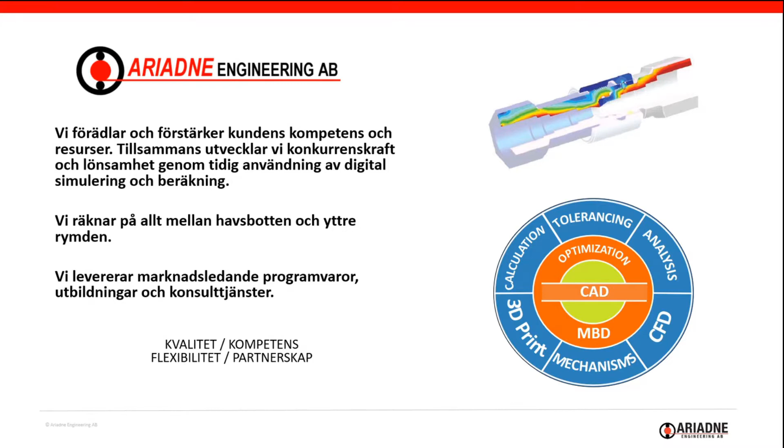Om vi tittar på bilden nere till höger ser man våra kompetensområden. Vi utgår från mitten med den digitala CAD-modellen, och precis nedanför står det MBD, Model Based Definition, vilket vi jobbar hårt med just nu. Vi vill hjälpa företag jobba effektivare. Vi ska se lite fördelar med MBD idag, för har man toleranserna i 3D-modellen läser programmet in dem helt automatiskt och man slipper all manuell inblandning. Det går mycket snabbare och man minimerar riskerna för fel.

Våra affärsområden är mjukvara, konsultuppdrag och utbildning. Vi är PTC-återförsäljare med Creo och alla program runt omkring där. Sigmetrix har verktyg för toleransanalys, och EZtol som vi ska titta på idag är ett av dem. Capvidia har Model Based Definition och automatisk kvalitetskontroll. Anark är Model Based Definition och intelligent informationshantering. Inom konsultuppdrag gör vi Model Based Definition workshops, toleransanalys och hållfasthetsberäkningar, form- och lägescoachning och mycket mer. Så hör av er om det är något ni behöver hjälp med.

Utbildning. Vi har gjort en hel del kurser själva som vi är väldigt stolta över. De har vi utvecklat själva, och det är grunderna i toleransanalys, form och läge, FEM för konstruktörer och design för 3D-print.

Men om vi då ska prata lite toleransanalys, vad är toleransanalys? Konstruktörerna sitter i en perfekt värld, och så ser det inte ut efter tillverkning när man får detaljen i handen. Det finns alltid en variation, det blir alltid lite större eller lite mindre. Och sen när man monterar ihop allt det här blir det en kedja av toleranser. Det kan bli ganska stora variationer i slutändan. Då gör man en analys på de här toleranserna så man får fram vilka dimensioner som påverkar mer eller mindre, och så kan man optimera toleranserna.

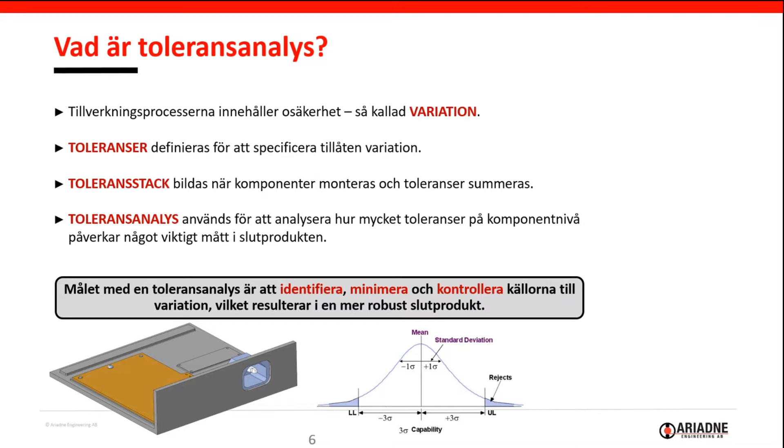Varför ska man göra en toleransanalys? Ja, det är för att få svar på hur och vart man kan spara tid och pengar. Det blir färre prototyper, och det gäller att vara snabbare än sina konkurrenter, snabbare ut på marknaden. Det blir ökad kvalitet, minskad support och nöjdare kunder helt enkelt.

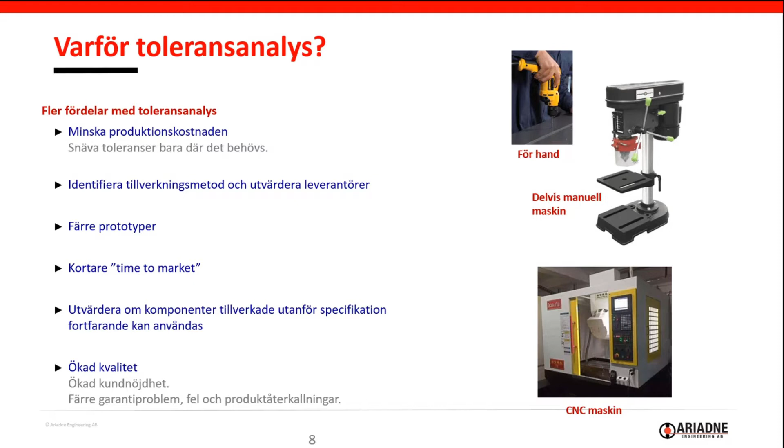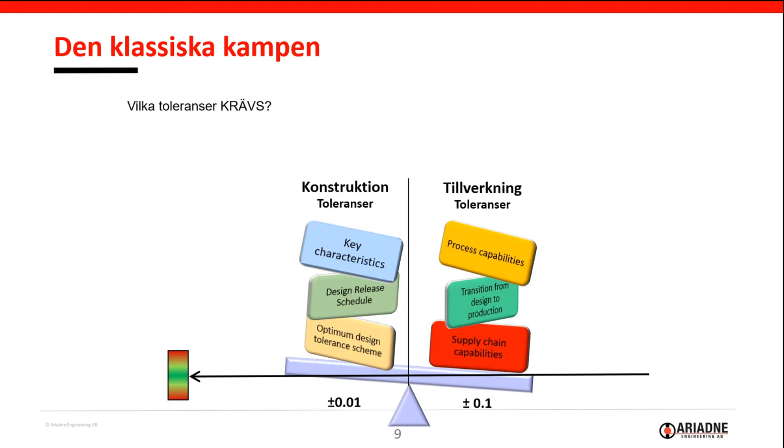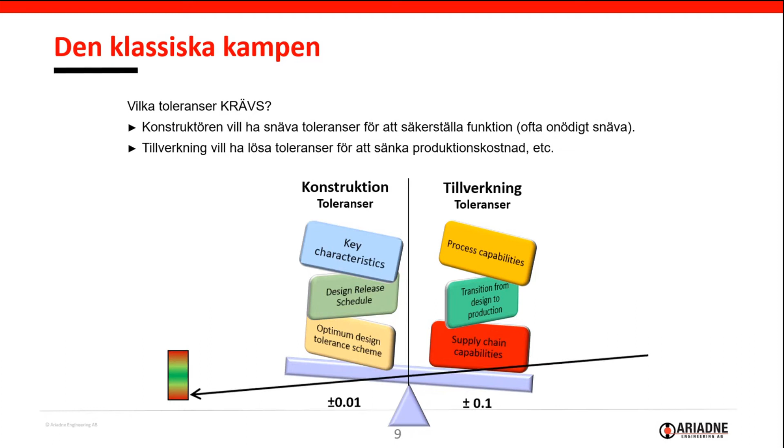Sen har vi den klassiska kampen mellan konstruktörer och tillverkning, vilka toleranser som krävs. Konstruktörerna vill ha snäva toleranser för att säkerställa funktion, och oftast tar man i lite för mycket. Tillverkning vill släppa på toleranserna för att sänka produktionskostnaden. Så det blir en balansvåg, och med en analys kan man få en bra fördelning och koll på läget.

Då tror jag det är dags för ett demo för att se hur det här fungerar. Felix.

All right, thank you, Patrick. I'll just share my screen.

Okay, welcome everyone to this practical demonstration of EZtol for Catia and NX. My name is Felix, and I'm an application engineer here at Ariadne Engineering, mostly involved with tolerance analysis. I'm going to give a short demonstration right now, and afterwards we're going to answer your questions.

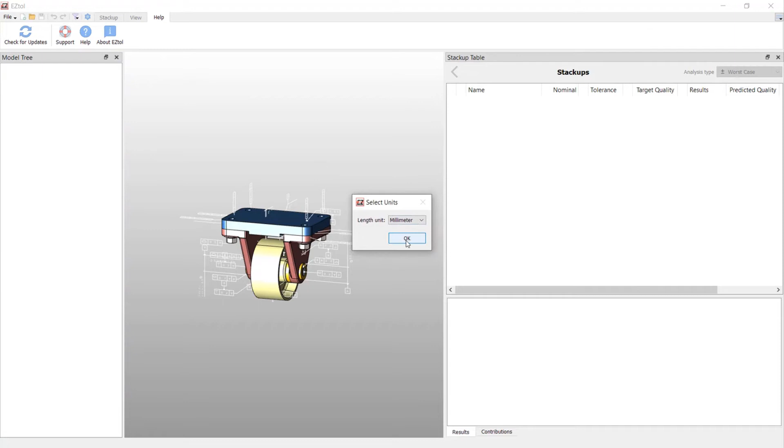So EZtol analysis for Catia and NX is a standalone application where you load in your CAD model. In this case, I'm going to open a Catia product, but it could also be an NX assembly file, for example. I'll just confirm that I want millimeter as my units.

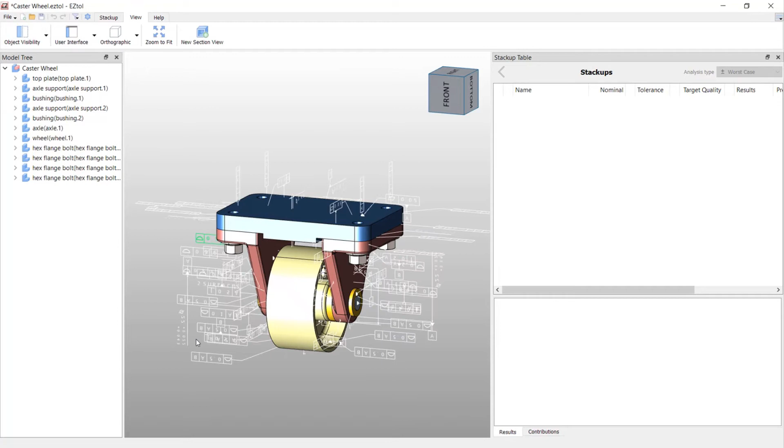And then we have the interface right here. We have the graphical interface in the middle; on the left-hand side, we have the model tree with all the parts of the assembly. On the right-hand side, we're going to have our stack-ups. The great thing with EZtol is that you are working directly with the 3D geometry, which helps immensely with visualization compared to normal spreadsheets. We can also reuse all the PMI we have in the 3D model. For example, if I activate the annotations here, we can see we have a lot of 3D annotations, which I'm going to reuse for my tolerance analysis.

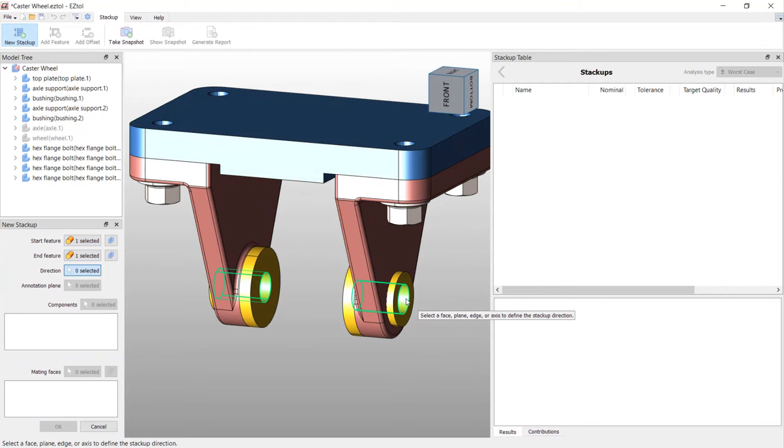But let's get started, and I'll show you how easy it is to create a one-dimensional stack-up. In this case, I'm going to hide the axle and the wheel, because what we want to investigate first is the alignment of the two bushings so that we can fit in our axle in between. For that, I'll just create a new stack-up, select the features I want to analyze, so the two holes in the bushings, and then place my annotation in the environment.

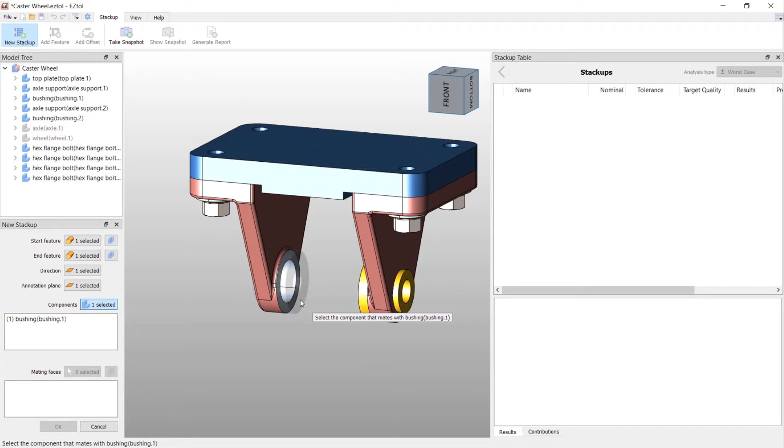All right, next step is to select all the parts in the tolerance loop. You can see one bushing is already transparent, so which part is the next? That would be the axle support, the top plate, axle support on the other side, and the last bushing.

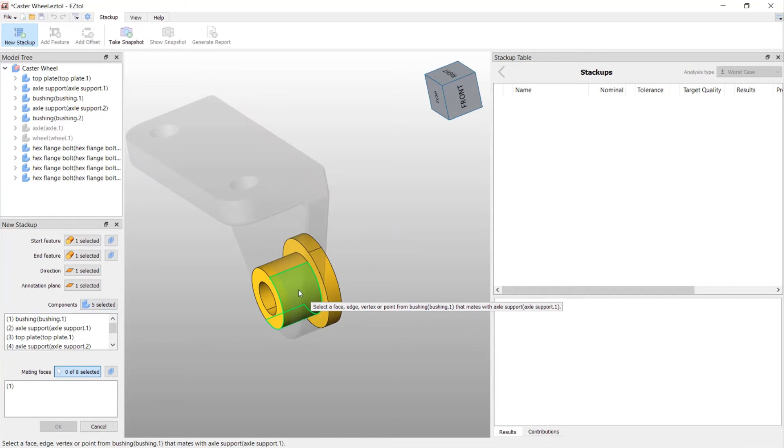And the last step is to select the contacting interfaces. So how do parts interact with each other? In this case, we have the outer diameter of the bushing to the hole in the axle support, two surfaces here, two surfaces here, and then the same on the other side.

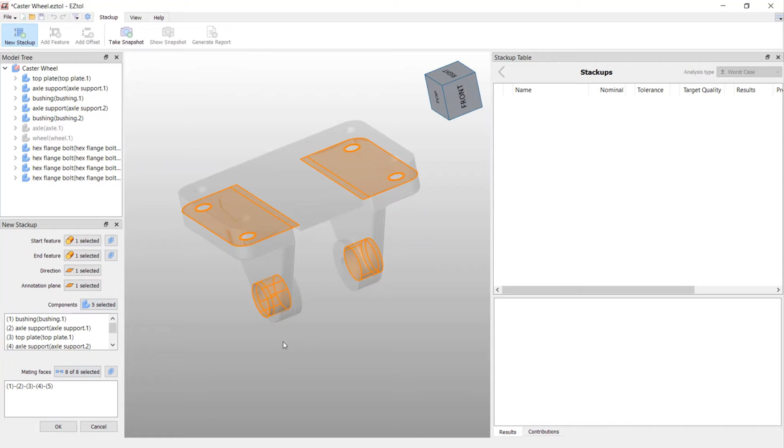And you can see it's really easy and intuitive. A lot of development has gone into making the interface as accessible as possible. So like that, I'll just click OK, and I've created my stack-up.

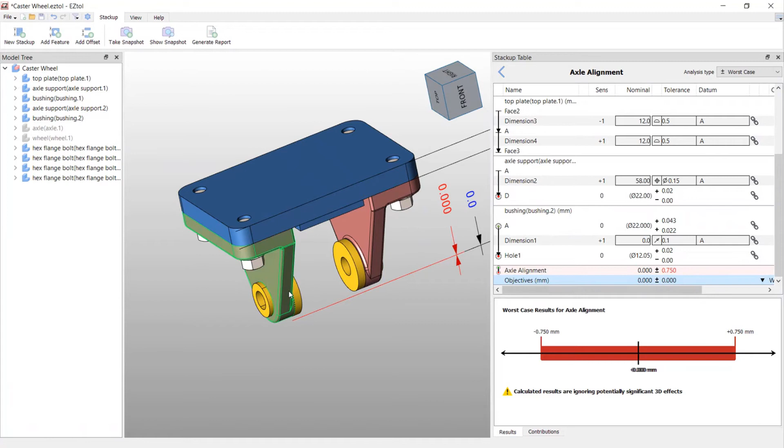Last thing to do is, what's the name of the stack-up? I'll just call it axle alignment. And what's my requirement? In this case, I want to have the two holes within plus minus 0.3 millimeters of each other.

All right, so you can see all the nominal dimensions in the graphical interface. The red one is, of course, what we're investigating right here. And of course, in the perfect CAD geometry, the two holes are perfectly aligned with each other.

And then down here we have, well, at the moment, our worst case result. So we can see here, nominal in the middle. Then I have my requirement plus minus 0.3. And with my current tolerances, I can have a deviation up to plus minus 0.75 in a worst case scenario.

So how do we get this result? Well, we get it through all the tolerances shown in the table above here. And you can see here, if I hover over one of the parts, it will highlight in the graphics environment. So first the bushing on the left-hand side, and then we have the hole, which has a diameter of nominally 12.05, and then a certain tolerance.

And on the right-hand side, we have this chain link icon, which means that this tolerance is an imported one. That comes directly from our 3D model. Then we have the outer diameter, and between them we have a runout tolerance. So we support both size dimensions, linear dimensions, as well as geometric tolerances.

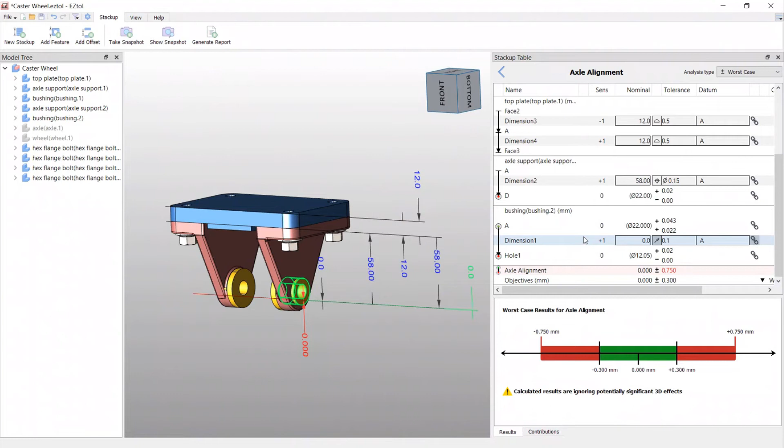But of course, the advantage of EZtol is that you don't only get the worst case result, but also a statistical analysis. So you can see up here, I can change between different analysis types. The current one, that's worst case, but I can also show root sum squared or a certain statistical metric, for example, capability, sigma value, percentage of yield, or defects per million opportunities.

Let's have a look at capability, or CPK, which is a very common industrial metric. And capability basically describes how well you fulfill your requirements.

So you can see here the results window has changed a little bit. We get a lot more information right now. For example, we have a target quality which we want to reach. In this case, it's set to 1.33. We have a current quality, which is 0.8. We have a mean and a standard deviation. And of course, we have our statistical distribution right here.

How do we get that distribution? Well, when we switch to statistical analysis, we got another column called CP, or capability. And that basically says that each part and dimension is manufactured to a certain quality. The default one you can see here is 1.0, which is a little bit more conservative estimate.

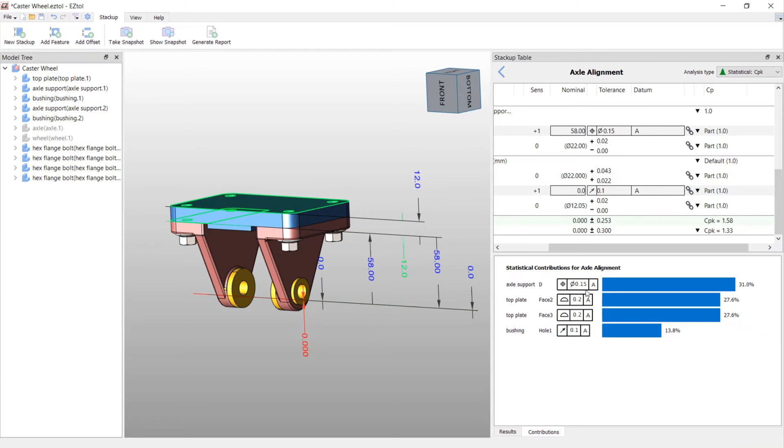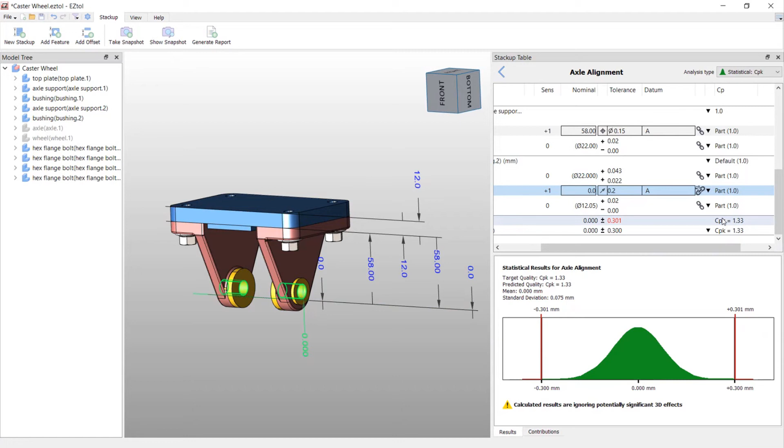So in this case, I want to loosen some of the low contributors. Run out is 0.1 right here, I'll put that to 0.2. Need to break the connection again first. 0.2. You can see now I'm pretty much at my target quality of 1.33. So this is an excellent tool to have a look at your stack up and decide where you might need to tighten or loosen some of the tolerances.

Additionally, you might have noticed the message down here. It says calculated results are ignoring potentially significant 3D effects. This is a hint that your current analysis might not be fully one-dimensional, so there can be some two-dimensional or three-dimensional effects which you might want to investigate. Again, this is not something a spreadsheet would give you, but since we are working with the actual geometry, we can investigate and see if a certain analysis might not be fully one-dimensional.

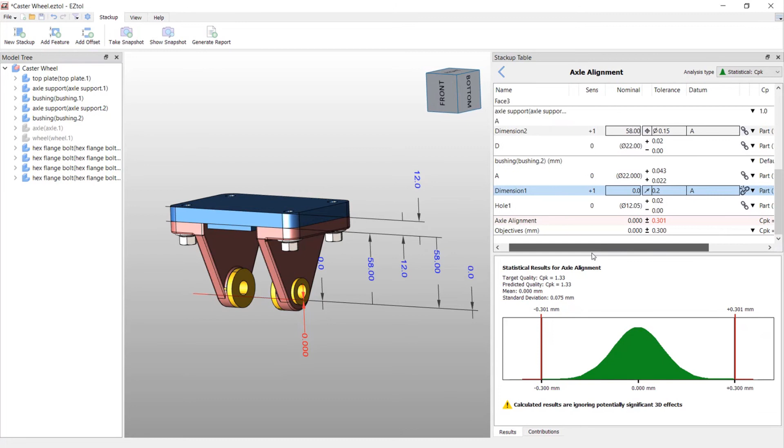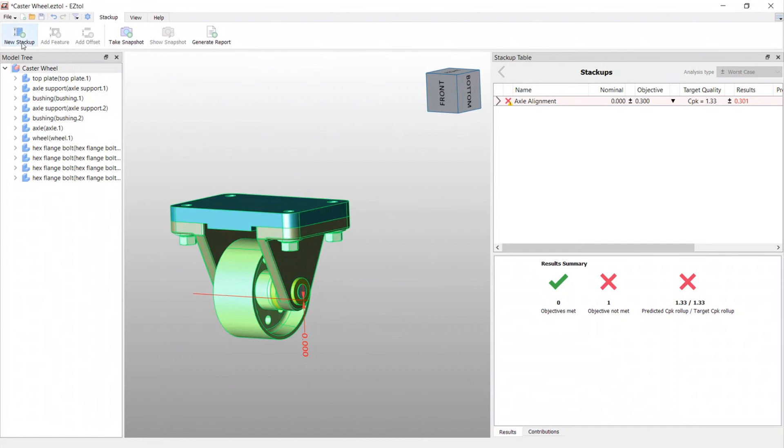All right, when I'm finished with my analysis, I can go back to the overview right here. And of course, often you have for any given product not only one specification, but multiple. So I'll add another stack up. In this case, I want to investigate the distance between the wheel and the top plate right here.

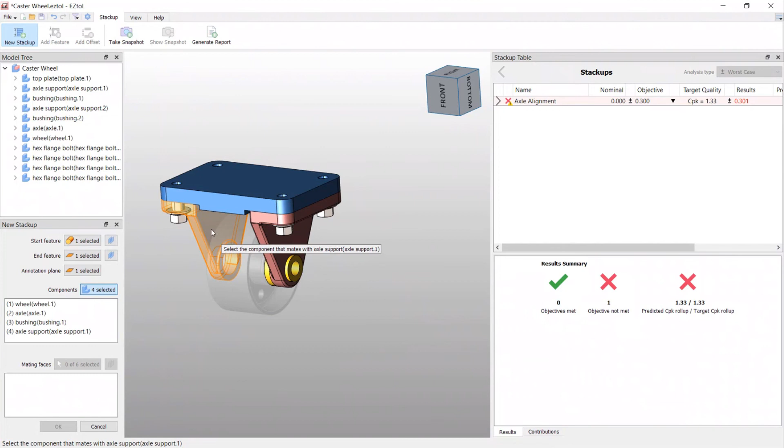All right, again, which parts are part of my tolerance loop? The axle, bushing, axle support, top plate. Again, where do they contact? Right here. So you can see it's very intuitive and easy to create your stack up.

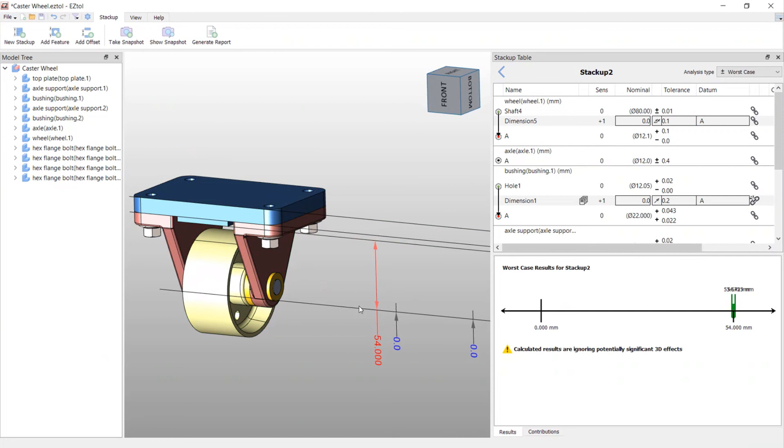Then just click OK, and again all the nominal dimensions will appear within the graphics interface. You can see currently I'm going from top surface to the center axis. I want to fix that. So just go to the stack up and choose an attachment, in this case near. All right, now we are measuring from the top of the wheel to the bottom surface.

And I'll just call it wheel clearance. And a requirement, well, I want that to be above 13.5 millimeters right here. And again, just like that, we've created our analysis.

Of course, you might not have 3D annotations in your product. If that's the case, you can very easily add tolerances within EZtol directly. So we support adding linear dimensions, size tolerances, geometric dimensions on the fly, and that's really no problem.

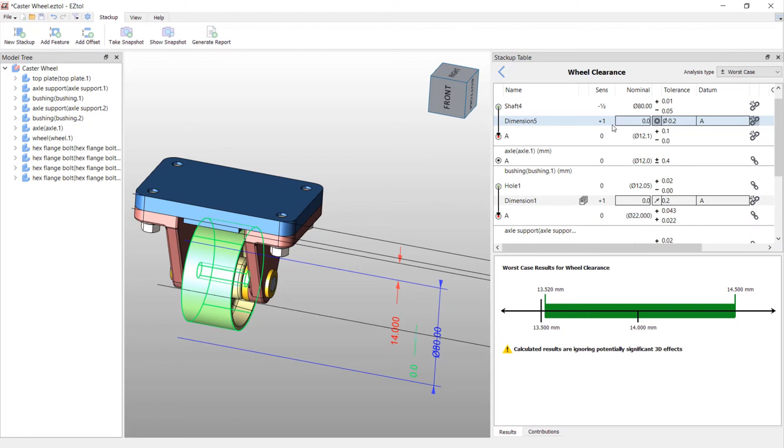So then I would just go in here for the wheel. What kind of size dimension do I want? Should be symmetric, should be plus minus, limits as I want. For example, here I can have a linear dimension going from the outer diameter to the inner diameter, but I can also have a geometric tolerance. And in this case, what is appropriate? Position, runout, and coaxiality. So even without 3D tolerances, it's really easy and quick to create your analysis.

All right, after I'm done with all the specifications, I might want to share my findings with colleagues. And for that, I can automatically generate a report.

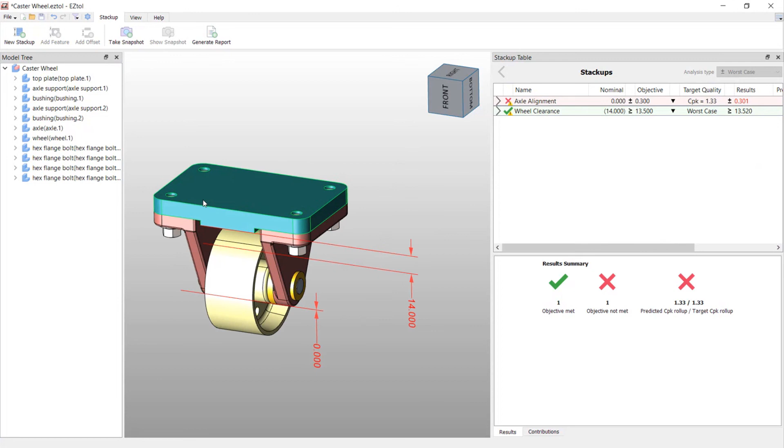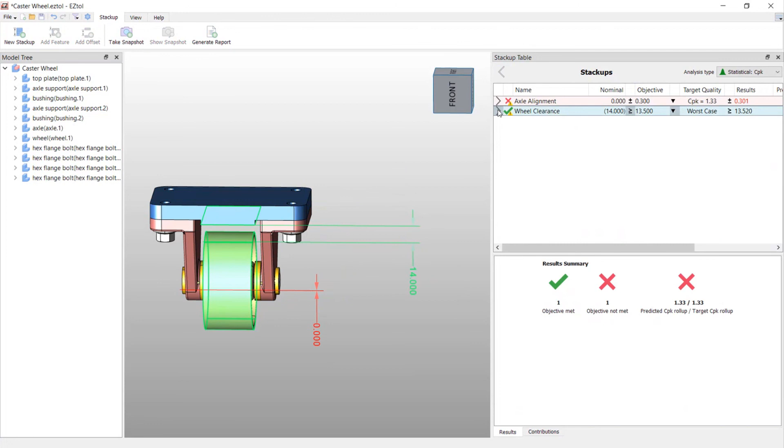And for that report, I can create snapshots of each individual analysis. So I'll just rearrange this right here a little bit, go like here, and then I can take a snapshot up here. I'll do it for the other one as well, just move them a little closer. Right here, take another snapshot, and one for the overall product.

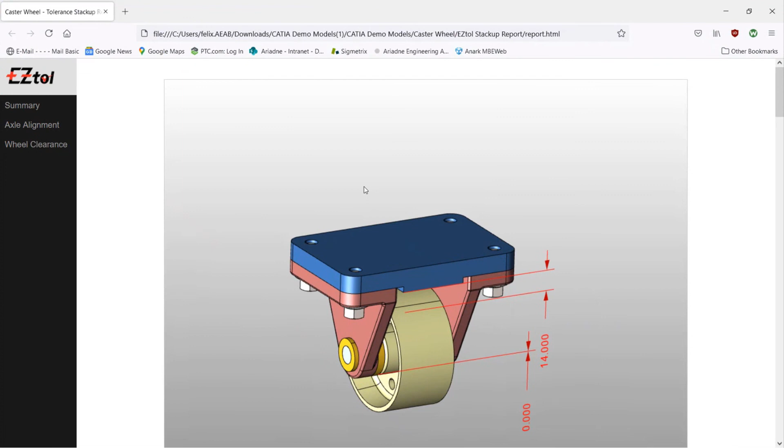Then just click Generate Report, give it a name. And what happens then is we create an HTML document, which you can easily share.

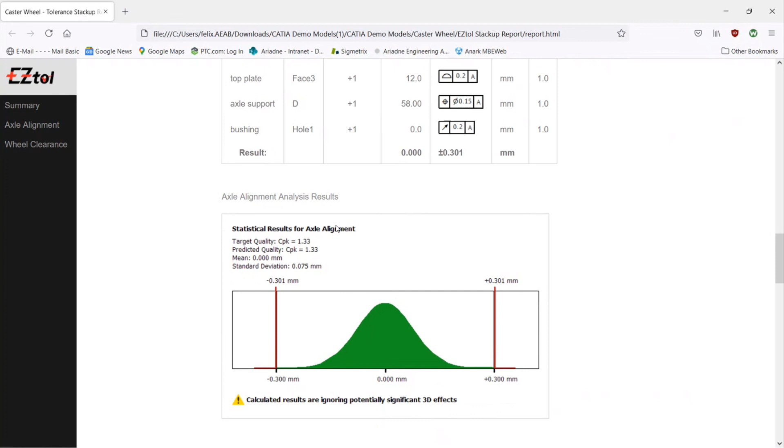You can see it has my kind of title, snapshot, date, of course, summary of my requirements. And then for each requirement, we have a screenshot, list of the involved tolerances, result picture, and then a list of the contributors. Then, of course, for all the others as well. So that's again a very quick and easy way to publish this information.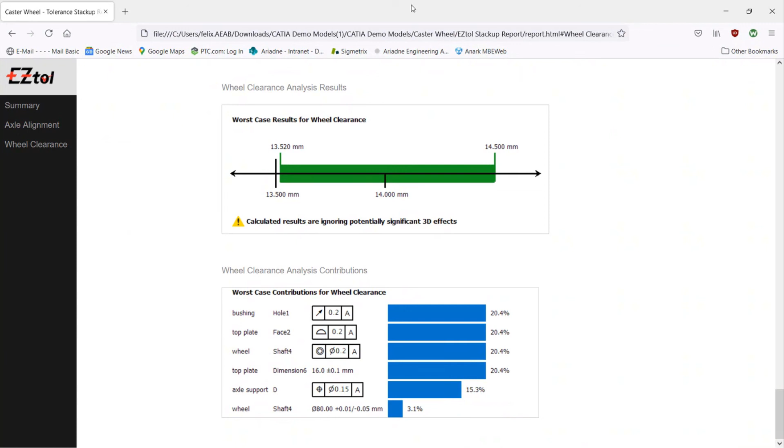All right, one last thing. You might wonder, well, what happens to all this information? Where does it get saved? What happens if I do some changes to my model?

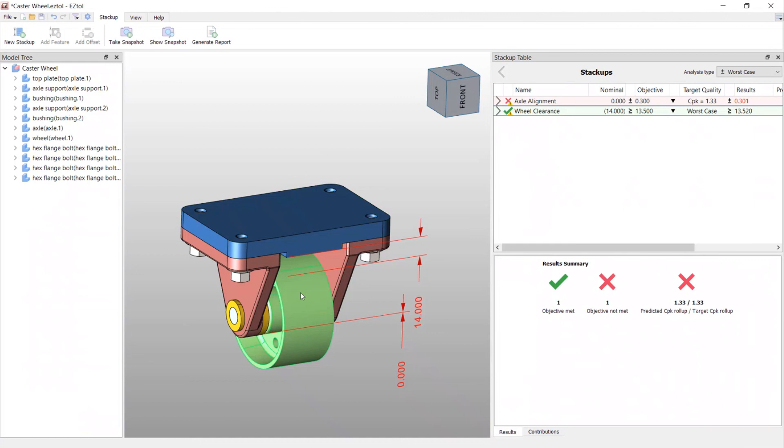Again, it's really convenient. If I do some changes to my geometry, let's say I make the wheel bigger or smaller, what I do then is I just reload the CAD model, and then all the information in my stack up gets updated automatically. So if the nominals changed, they'll get updated automatically. If tolerances changed, they'll get updated automatically as well. So again, you don't need to go back and play with your spreadsheet again.

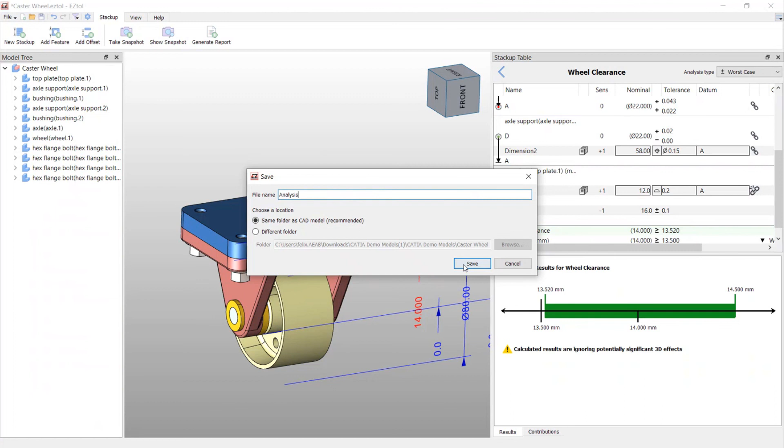It happens automatically. And after I've done my work, I can save this information as a separate file, wherever you want. And then if I want to get back the next day, I just load in the model, and then I just load in, open the file.

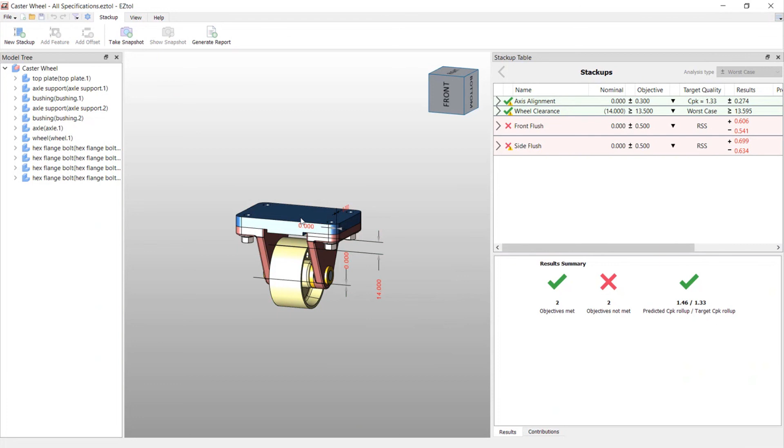So for example, here I have a file where I have multiple specifications. So I can just open that one, and you can see it will automatically attach itself to the model. You can see here I have a few more specifications defined. So this is a very easy and graphical way to do your one-dimensional stack up.